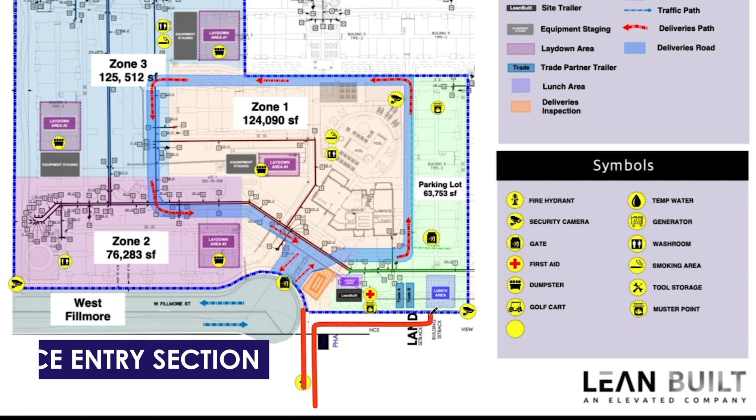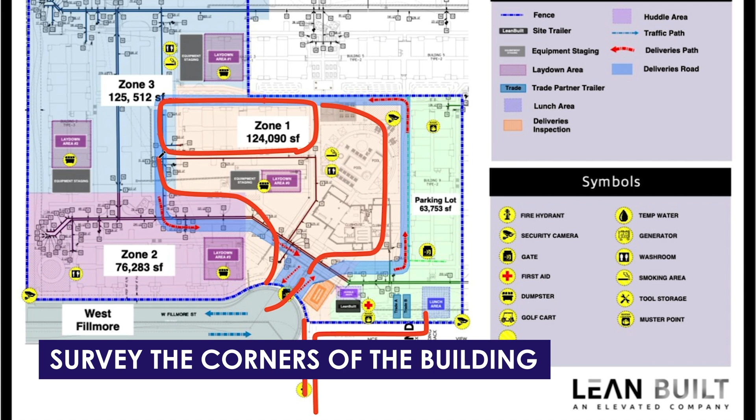Probably you're going to want to mobilize immediately and get to your first building pad—I know that's what we're doing. We need to get to our first building pad, so we want to find out if we can get to this first area with a laydown, survey the corners of the building, do the pad certification, and kick off the structural phase while we're moving in this direction for site utilities.

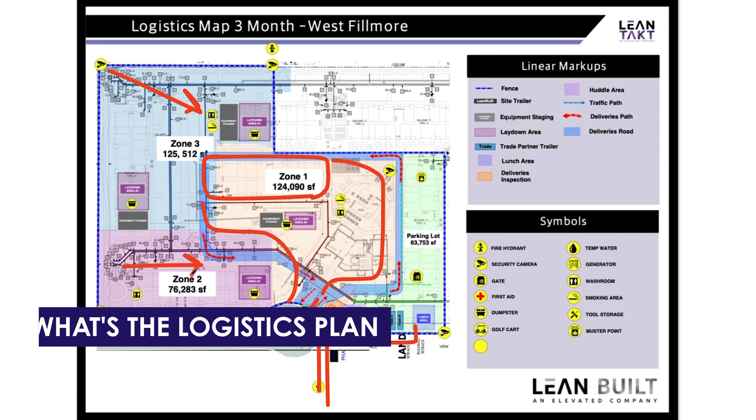So there are real benefits to saying, what's the logistics plan just for the first 3 months? You have the typical things—your markups, symbols, clear drawing—but this is basically mobilize to the front.

How do we get to our first critical activities on our critical chain or path of critical flow so we can enable the rest of the project? Understanding that is crucial, because you'll see how your grading affects your site utilities and your structural phase. It's absolutely 100%.

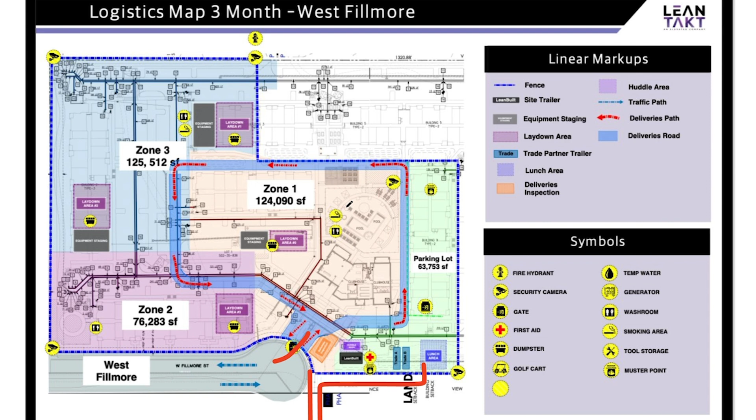So what we're going to do on this project is use this map to make sure all the trades clearly understand what we're doing and how we're going to mobilize to the front, to coin a phrase.

So let me show you a couple of tools that I want to make sure you know about that are available to you at any time.

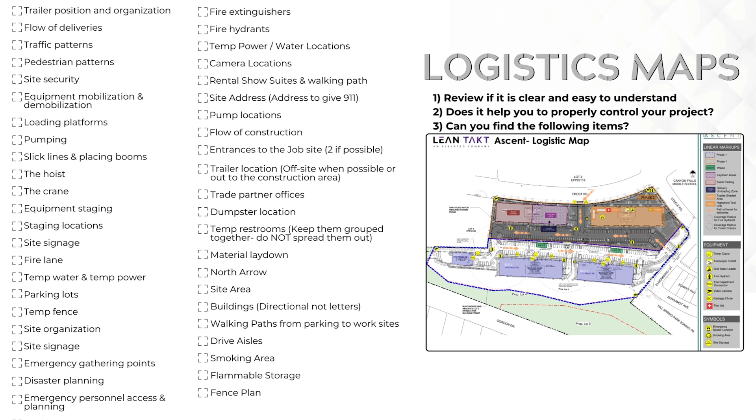Okay, one of the first tools I want you to have is the list. If you're doing a logistics plan and want to make sure you have everything incorporated, especially to mobilize to those first critical areas, I want you to have this list. We're going to add this in the description below. This list has been put together over many years from a lot of different experts, and it's used to trigger you to see where all of these things are located. Anything done well could save you $1,000, $10,000, $50,000. We don't want to be moving things on the project site. We want them to go to one location where they ought to be well thought out.

Another tool I want to take you to is these logistics rules. I'm just opening it up in Canva, I hope you all don't mind that. Basically, if you open up the file, you'll see on the front page I have this example, and then here are some rules to keep in mind. This was a LinkedIn post once, and we go rule by rule — there's 1 through 19, I believe. I want you to go through these logistics rules. We're going to include this in the description below. This isn't talked about very often, but there are 19 key rules for logistics planning that you have to keep in mind.

Now, another resource I want to give you is our actual blog post. If you go to the Elevate Construction website, I'll show you how to get there. Let's say you're all the way back on the front, and there's a picture of me. Sorry, everybody. Okay, so you go to the blog post, type in logistics. Let's see if I can do that while recording a YouTube video. Okay, perfect — and logistics is number one.

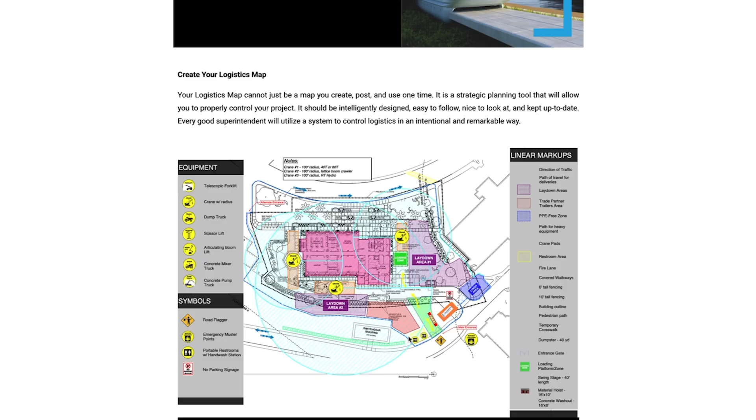When you click on this, you'll see we have the same stuff, a nice example, the lists. And here's something super cool, I hope you love it: there's a template in Bluebeam for how to actually create these and toolbox objects so you can use similar styles. If you don't have any of these, we're more than happy to share this content with you and even help you create templates.

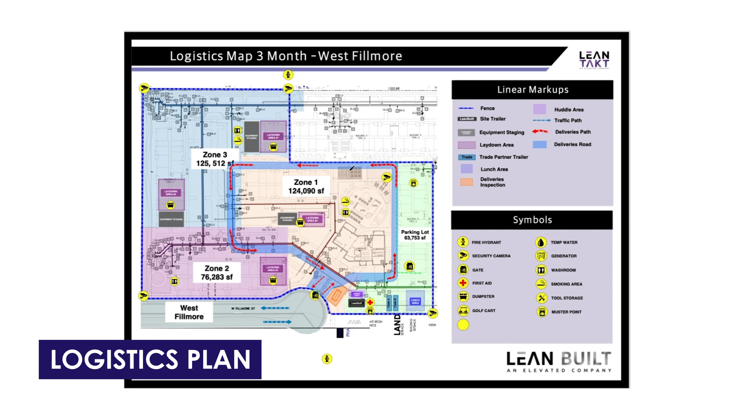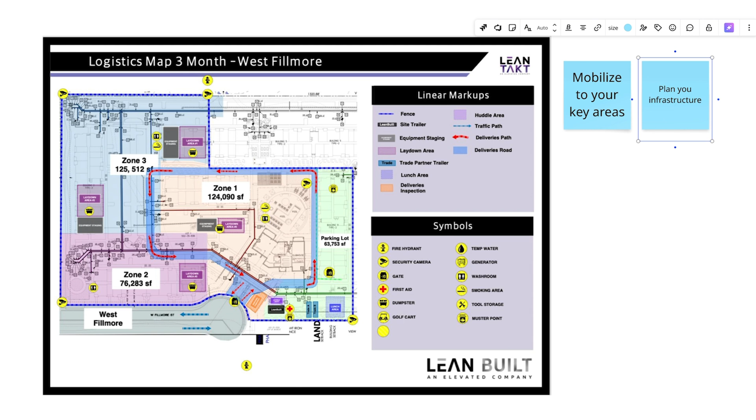The bottom line is when you're creating a logistics plan for the first part — and I'll get a little frisky here with my stickies, I love me some stickies on Miro — here are the priorities. You want to mobilize to your key areas, so you can start out properly, start your structural phase, start your foundations. That is absolutely key. And then you want to plan your infrastructure — your temp water, your temp power — and basically give everybody a vision for how you are going to mobilize on this project.

And I'll add a third one: you want to start strong. You're not going to pick up time very easily later in the project when you have 40 dependent contractors, but you can early on, and we don't want to be moving things around. So we definitely want to have a logistics plan early on.

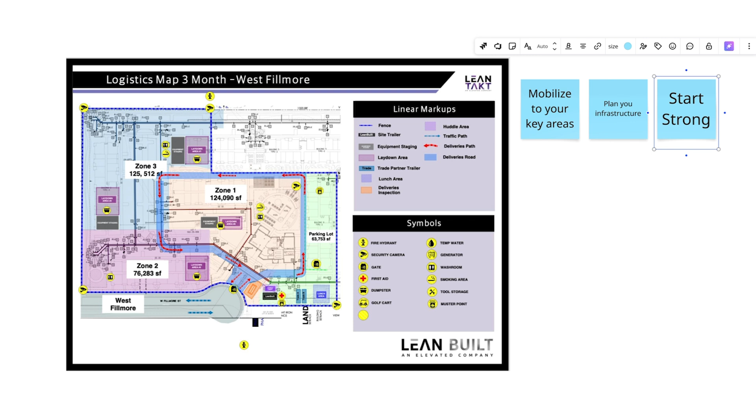So I'm going to give you an image of this, the blog post, and both of those documents I referenced — the lists and the rules — and we're going to turn this into a blog post for you. My hope is that you're able to do logistics planning with live documentation, meaning don't just put this up on the wall — use it as a tool and get your people to their first area so you can take care of your critical chain and your path of critical flow. I hope you've enjoyed this video. On we go.